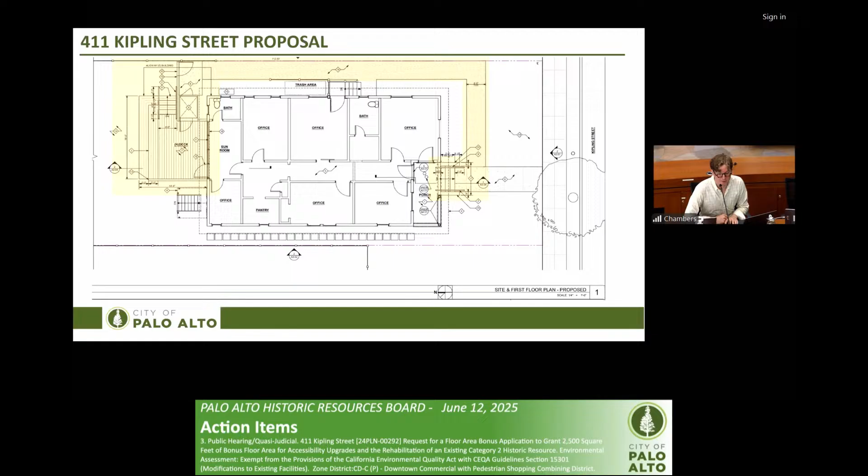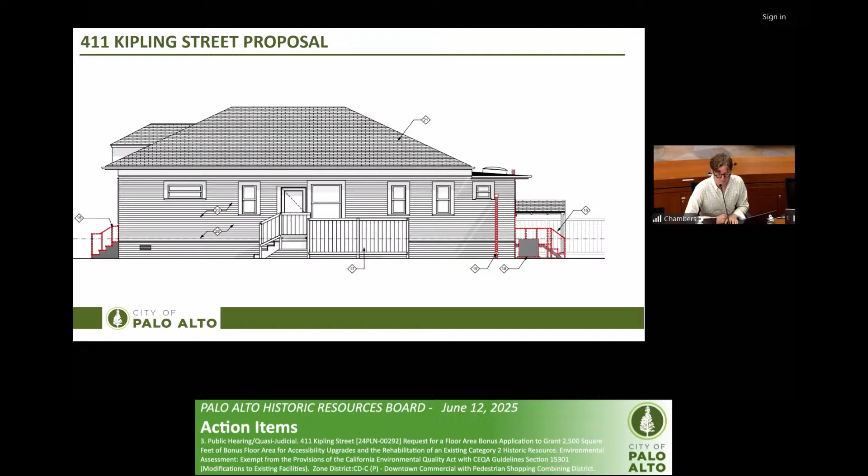If we go through, this is the rear elevation, what's existing and what's proposed. So as noted, it would be the new deck, and behind that fence is the wheelchair lift. Here's the front of the facade. And here we are again, noting those changes of the rear deck, as well as the front stairs. And here is a rendering of the proposed work in the rear.

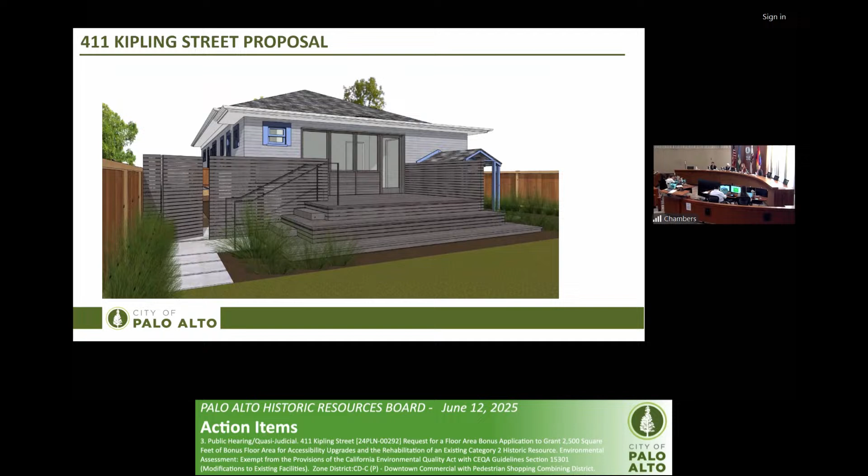Onto recommendations: staff concurs with the findings of the Page and Turnbull evaluation and supports the property owner's request for their floor area bonus. The Historic Resources Board today is requested to recommend to the Director of Planning and Development Services that the project conforms to the Secretary of Interior standards for rehabilitation.

I can entertain any further questions, and I believe the applicant has a presentation as well. Are there any questions at this point? No. Okay, let's move on to the applicant presentation then.

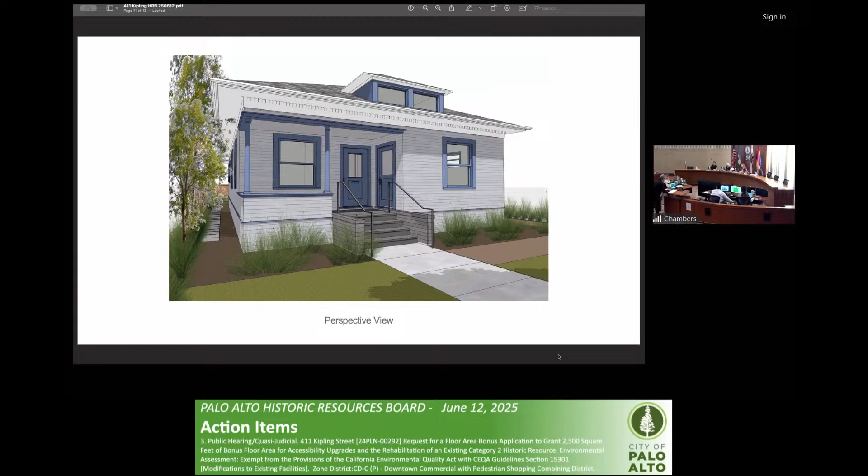Just bear with me here first. Let's see. Oops. Hang on one second, I'm at the end of the presentation. There we go, make sure it's gonna... interesting. Well, I'll advance, sort of improvised here.

Good morning, Chair Suslowich. My name is Ken Hayes with Hayes Group Architects. I'm pleased to be here in front of the rest of the board this morning. I'm joined with my client, John Shank with Thwaites Brothers, as well as Mason Hayes, the designer in my office. We're also joined by Jen Hembry from Page and Turnbull on Zoom if there are any questions related to the Secretary of the Interior Standards. I want to thank Planner Switzer for helping us bring the application before you this morning.

411 is located here. Can you see it? No, it's not appearing on our screens right now. Huh. It's frozen on mine. All right, I've got to force quit Zoom. Apologize. Oh, no problem. Force quit Zoom, and it's not quitting. There we go.

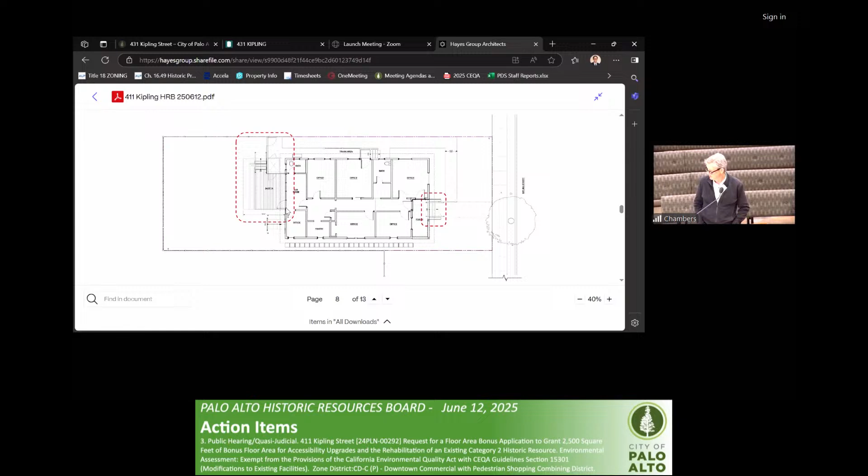It will be replacing the non-historic rear deck with a new deck and stair, so you'll have a larger area to go into the building. There's a gate on the east side as well that we'll be replacing with a new gate. We'll be removing the non-historic door and 3 windows on that rear back porch addition, and that's where we have the intervention of the new windows and the accessible door. The deck kind of relates to that.

There's general rehabilitation of the wood siding, the dentils, the trim, the sash where it needs to be, for the windows to be restored. We'll do an assessment of the existing conditions out there and make those improvements in compliance with the Secretary of the Interior standards.

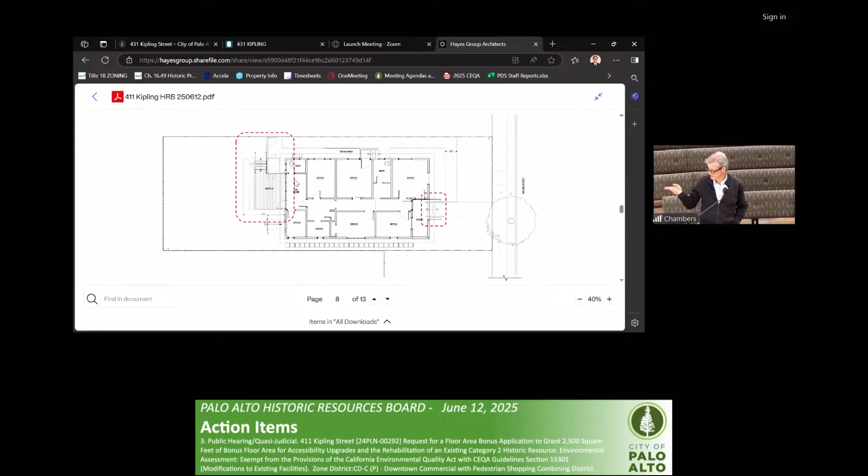That's all going to be stained redwood in the color that was on the finish board that I think you might still have in front of you.

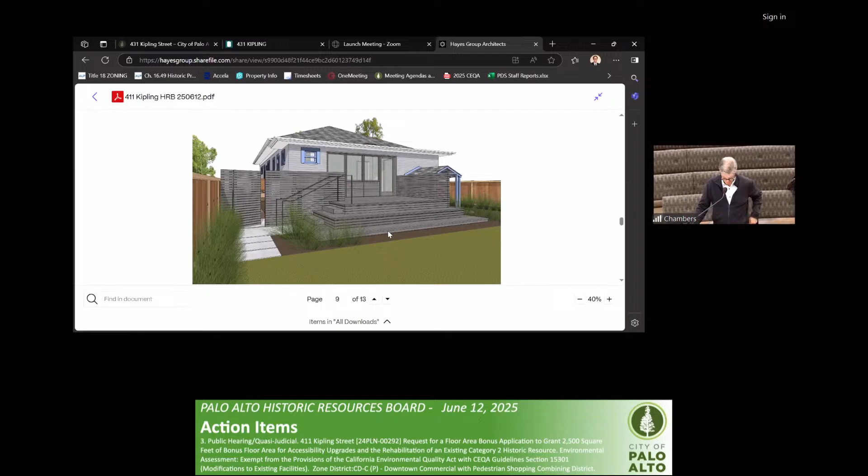From another angle, the other side, you can see the door to the lift right there, and then the new windows and the door, the accessible door into the building.

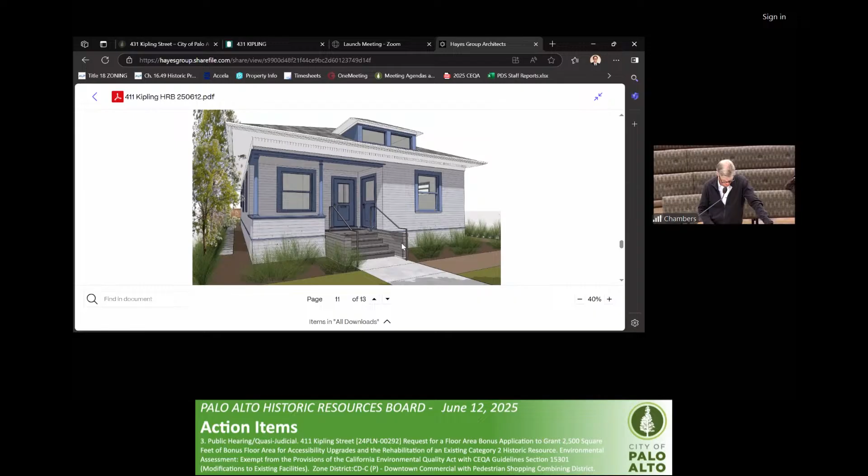At the front of the building, the new stair railings and cheek walls. We're differentiating all the new work so that it's distinct and separate from the historic, so there's no confusion - we have, instead of beveled siding, a shiplap siding, and we'd be staining that. So the materials include the shiplap siding, new wood windows, metal railings, the stained wood deck and fence, and we'd be repainting the entire building once we do the restoration work.

As Stephen just explained, Page and Turnbull has reviewed it for compliance with the Secretary of the Interior standards, and they found it to be in compliance. So we're looking forward to getting started, and the first step is to have this discussion today and get your recommendation to the director.

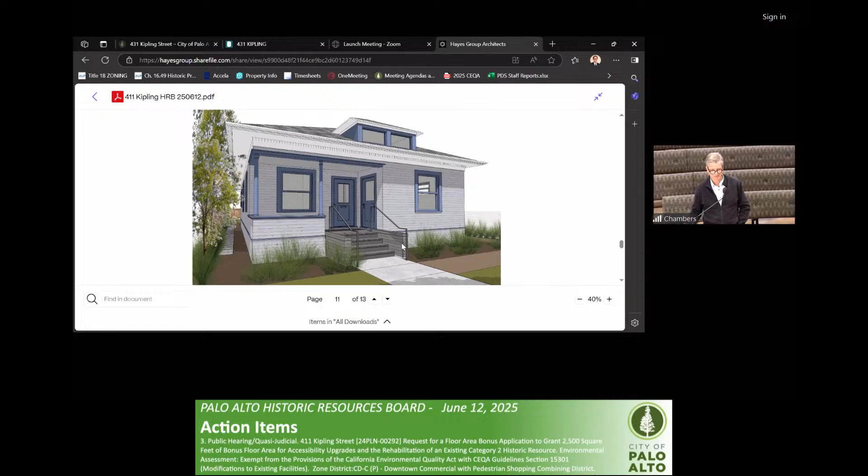All right, so any questions, I'm happy to answer. Thank you - do we have any questions for the applicant?

I just wanted to ask, the decision to go with casement and fixed on the new rear windows instead of doing double hung like the existing front - was that driven by the desire to make that change distinct from the original? A bit more differentiated, correct? Yeah. Okay.

So on the square footage under the TDR, is some of that being used here and then some, no? No, it'll all be available for transfer off-site. Okay.

No other questions? Is there any public comment on this particular agenda item? Through the chair, I've received no public comment.

Does the board have any discussion items? Do we want to chat about anything? No? Okay.

Well, I just want to say it's so nice to see something actually being taken care of instead of demolished. It's nice to see these every once in a while. Thank you.

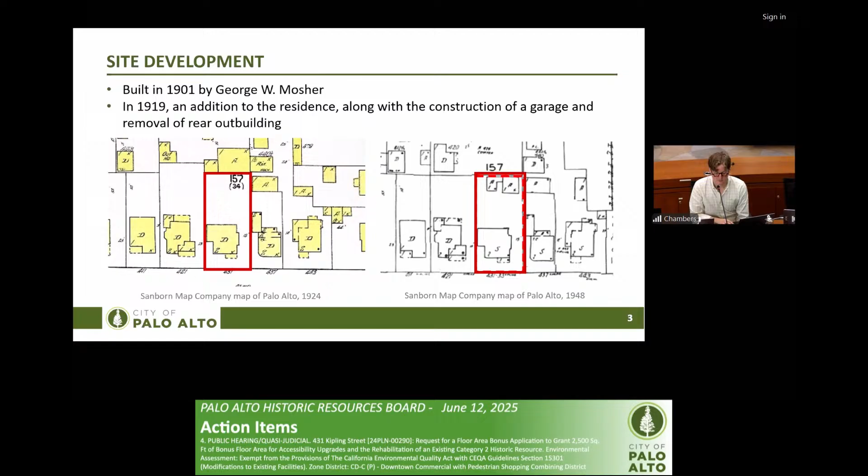A little bit further on some site development here: in 1938, there was a purchase of the property and the lower unit was converted to a window shade store that operated until the 1970s. In the 1980s, the current property owner took ownership of the property, and since that time Vino Local has operated on the first floor commercial unit.

As with the other property, this is currently a Category 2 major building of regional importance. It was previously a Category 4 contributing building on the city's inventory. The Historic Resources Board recommended an upgrade on June 11th, 2024, and council ultimately approved that upgrade in September 9th of last year.

So as noted, these floor area bonuses and the transfer of development rights are available for qualifying rehabilitation projects of properties that are historic categories 1 and 2, if they are located in the commercial downtown area. This property is a Category 2, it does have a rehabilitation project, and it is located in the downtown area.

The applicant is requesting 2,500 square feet, since that is the greater value of 25% of the existing building for floor area. Getting into the proposal.

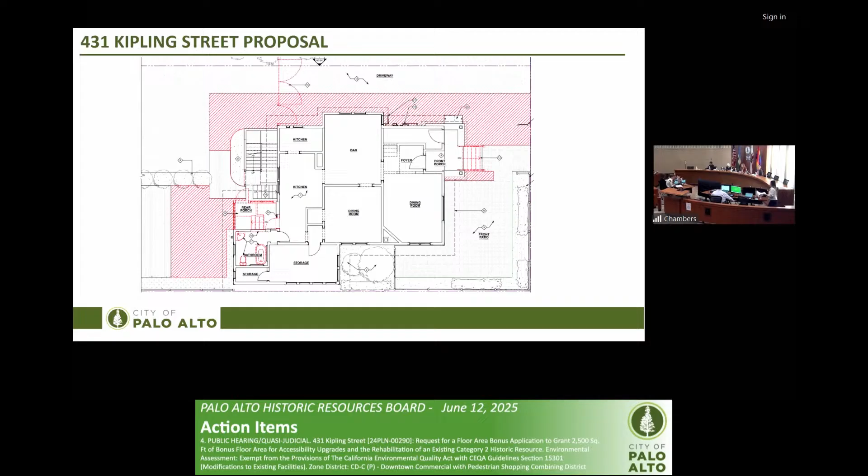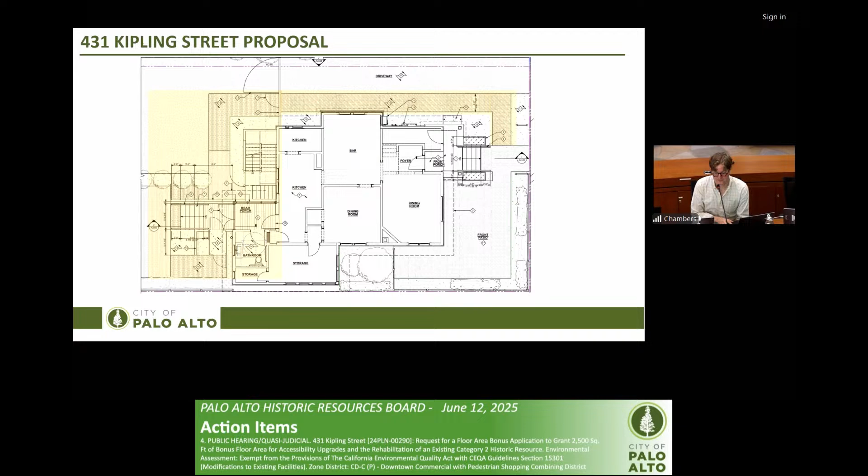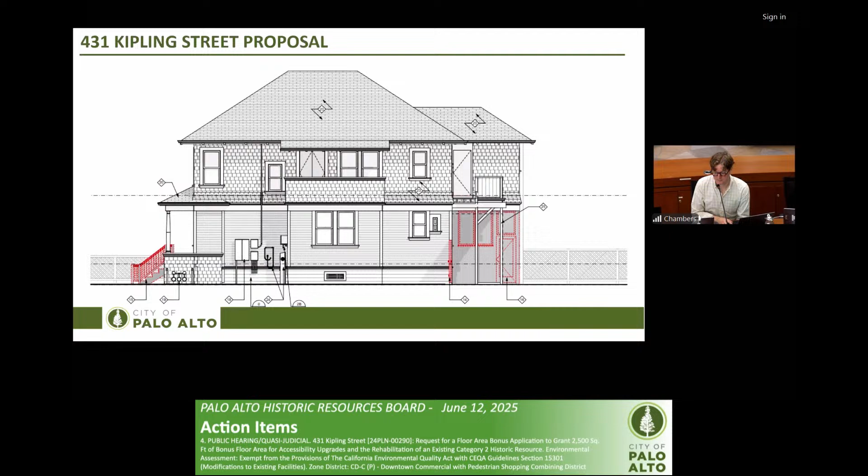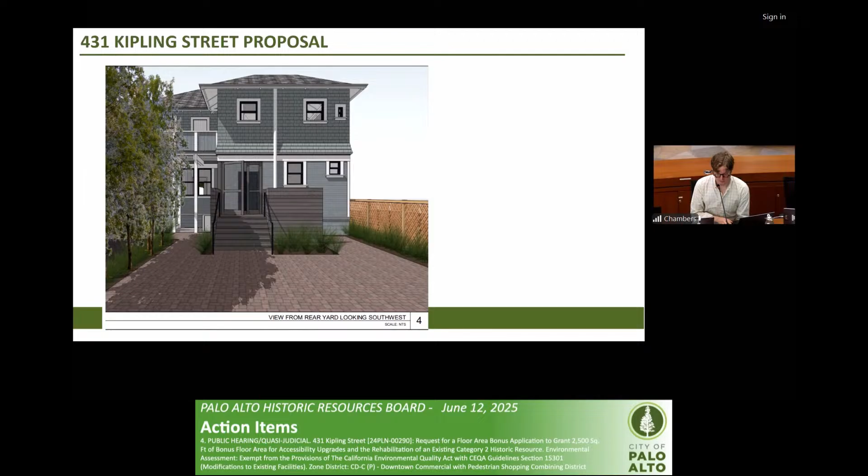I do have one rendering here, actually two on this one. So here is the rear of the structure, and another rendering for the proposed work in the rear.

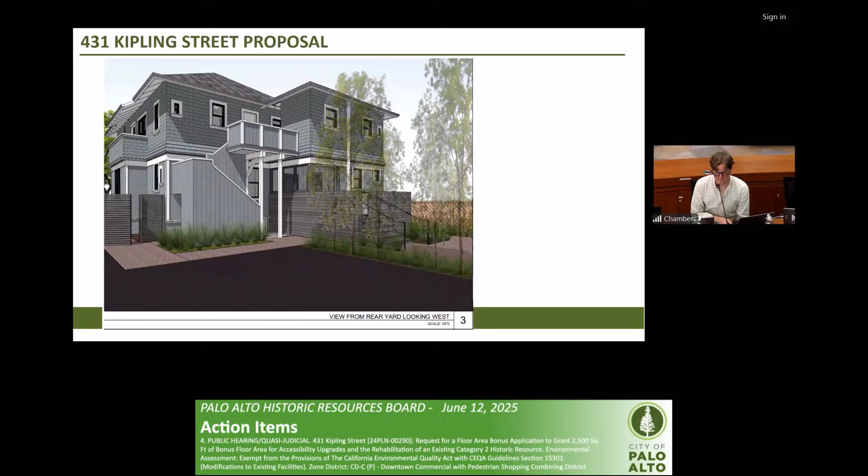So with that, staff does concur with the findings of the evaluation of Page and Turnbull and supports the owner's request for their floor area project. The Historic Resources Board today is requested to recommend to the Director of Planning and Development Services that the project conforms with the Secretary of Interior standards for rehabilitation.

And I can entertain any questions. Okay, thank you. Are there any questions from the board at this point? No? Okay, let's move on to the applicant presentation then.

So we're going to try it again and see if I can control it. Not that Mr. Switzer didn't do a great job, but...

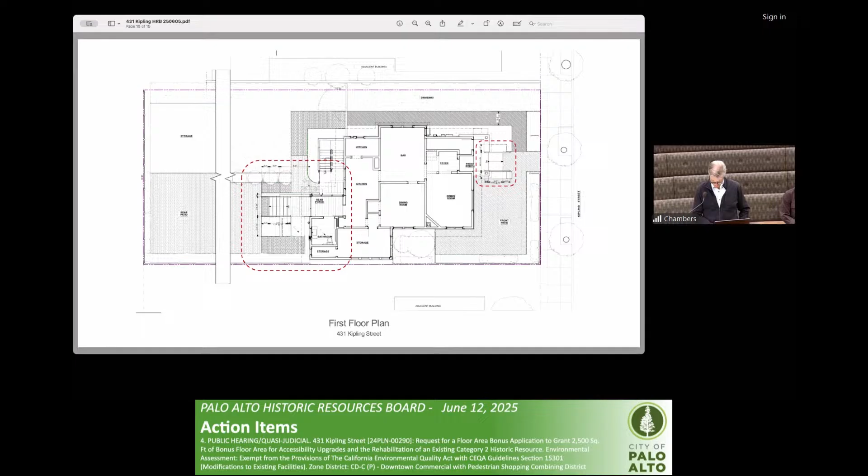We'll be replacing the roof on this project, repainting the entire exterior of the building, and doing the same kind of restoration to the wood siding, the details, the columns, the rafter tails, once we do a thorough inspection of all of that.

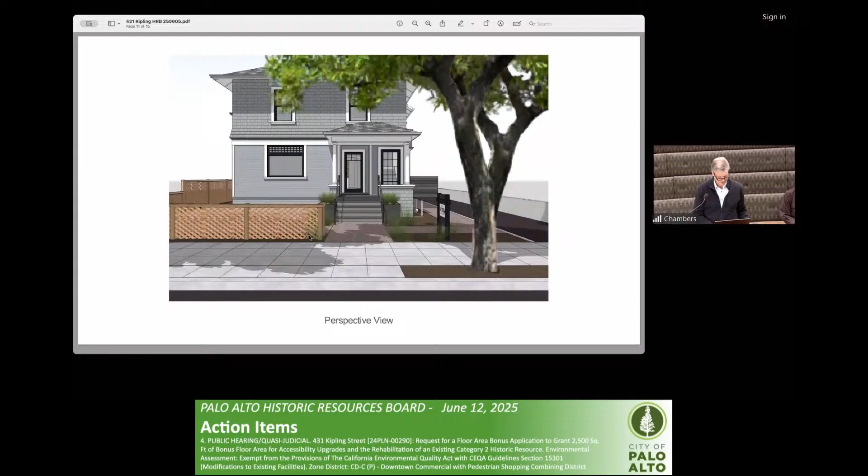There's some views of the porch with the planters on either side. This is the rear area where you'd come around here, and the lift is on this side, creating a very direct pathway for servers and employees to get to the backyard dining area. And a view from above, so you see how that lays out.

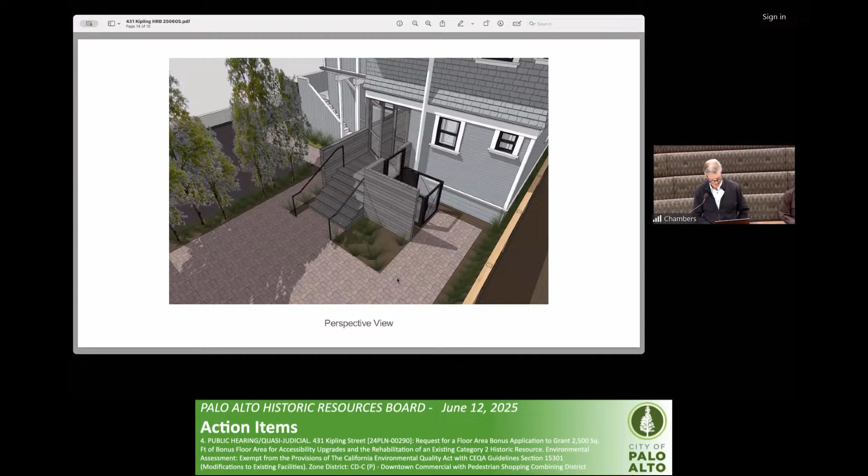The improvements that we're proposing were reviewed by Page and Turnbull, and they found them to be in compliance. So just like 411, the next step is to get your recommendation to the director to recommend approval of the rehabilitation plan. I'm happy to answer any questions that you might have as well.

Thank you. Thank you so much. Are there board questions for the applicant? No? Okay, sounds like there are not any questions.

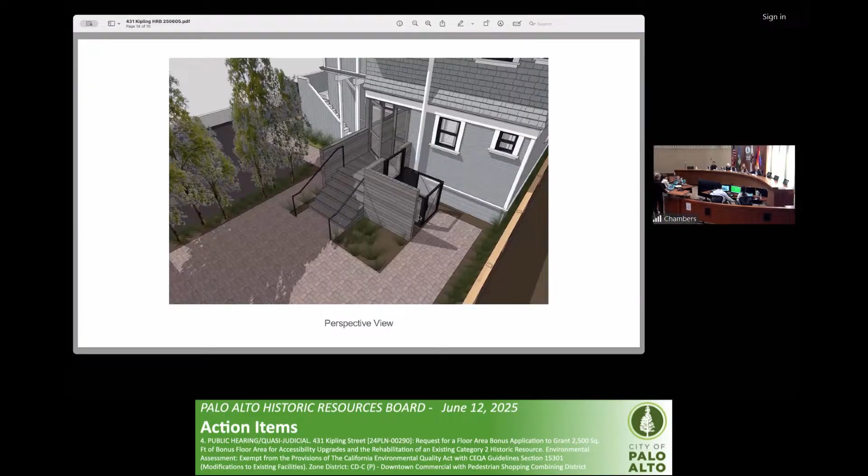Yeah, thank you so much. Again, speaking for myself, this project looks to comply with the Secretary of the Interior standards. If there are other board members wishing to discuss.

I love that this building is being saved and really made to function well. I have to express a little bit of disappointment, and I know it was already there, that the back really isn't reflective of the age of the building at all, only because I like to hang out back there. I'm somewhat disappointed that there's not more sense of permanence in the back rather than such a broad expression of the adaptability, which I appreciate too. So I know it's conflict, but I'd like to have both, please.

If I may. I don't believe that we took public comment on this item. Sorry, yes, thank you. Okay, let's wrap up with the discussion, and then I'll make sure we get that in there.

All right, I do have one question. This house seems to be framed relatively high above grade. I'm curious why, or if you ever looked at the option of maybe raising grade in the back, so it wasn't so many steps, and the accessibility challenge wasn't as big. Was that a possibility that could be looked at?